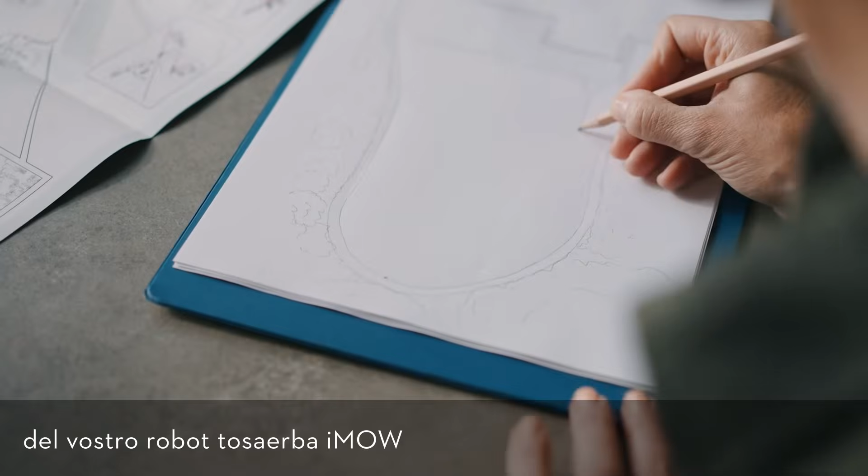We will now show you how to properly prepare the installation of your iMOW robotic mower and things to consider when planning its installation. For a smooth initial operation, first familiarize yourself with the user manual and the quick guide of the robotic mower.

The iMOW robotic mower mows the lawn in random path patterns and recognizes fixed obstacles on the mowing area using ultrasound sensors and a bump sensor. As soon as it detects a fixed obstacle, the device slows down, bumps against the obstacle, and then continues to move in a different direction.

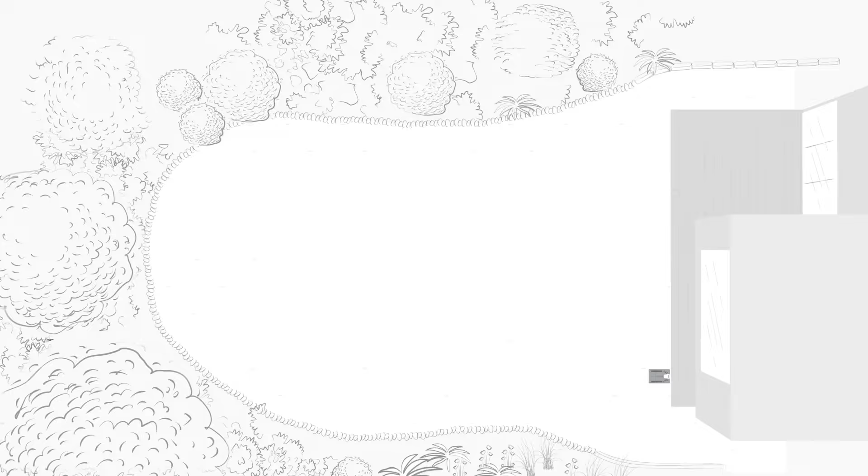To define the borders of the mowing area, you first have to route a perimeter wire around the mowing area. Areas the robot mower must not navigate and obstacles it must not come into contact with can be blocked off from the remaining mowing area with the help of the perimeter wire. If the iMOW identifies or reaches the boundary of the mowing area, it slows down and then continues to move in a different direction.

The robotic mower can be operated and configured at any time with the My iMOW app. You can also use the keys of the control panel. Light strips, a matrix display, and short voice outputs provide information about the current status of the robotic mower.

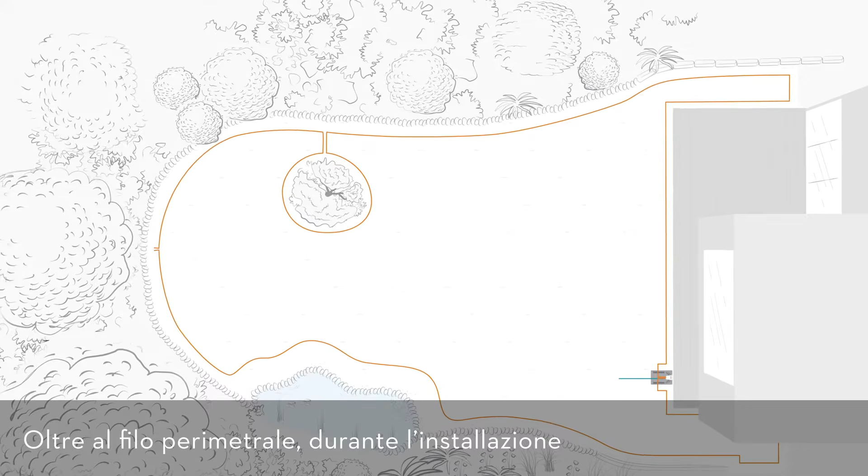In addition to the perimeter wire, a guide wire must also be laid during installation. This helps the robotic mower to find the direct route to the docking station if the mowing operation is canceled or the battery needs to be recharged.

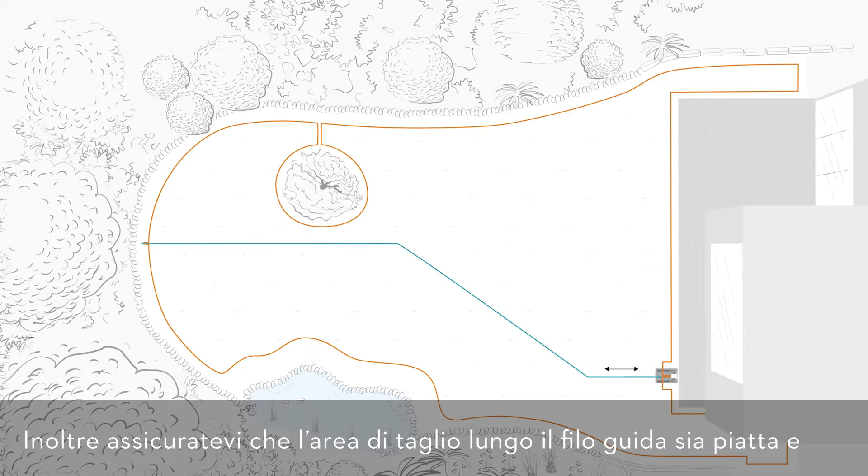The guide wire must be routed from the docking station for 2 meters in a straight line and at a right angle. Also, ensure that the mowing area is level and free from obstacles in the direction of travel towards the docking station along the guide wire: 1.2 meters on the left side and 37 centimeters on the right side.

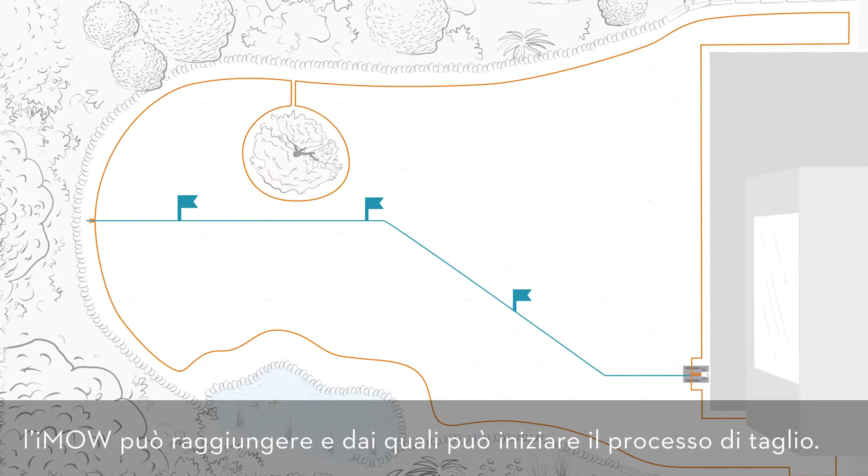You can set up to 3 starting points on a guide wire, which the iMOW can approach directly and start to mow from there. You can also use the guide wire to divide the mowing area into several zones. For example, Zone A and Zone B can be approached separately according to your mowing plan.

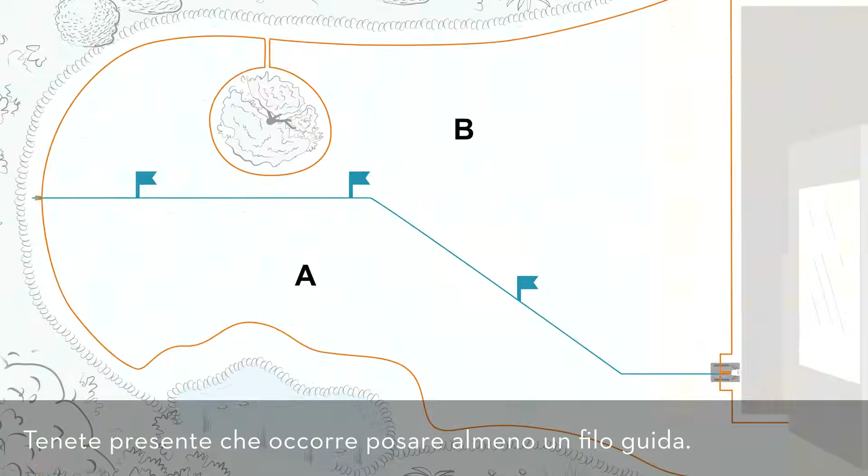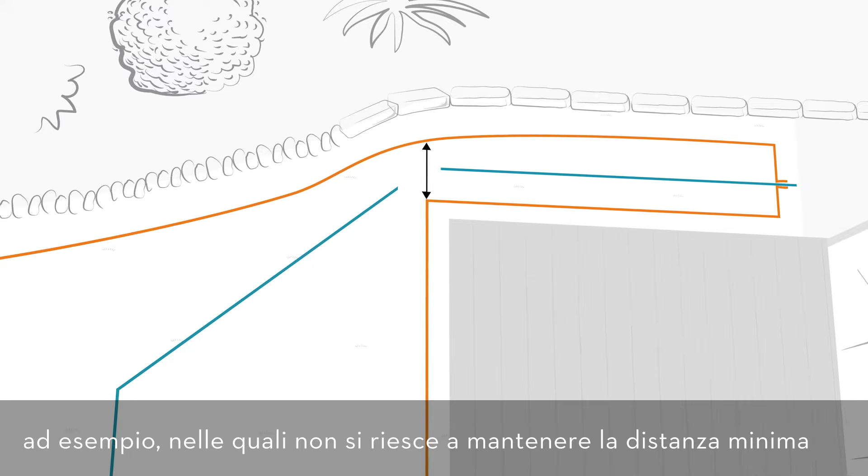Please note that you have to route at least 1 guide wire. By default, you can route 2 guide wires. With the iMOW EVO models, you can even route up to 3 guide wires. This makes it also possible to guide the iMOW through confined areas where the minimum distance between the perimeter wires of 2 meters cannot be achieved.

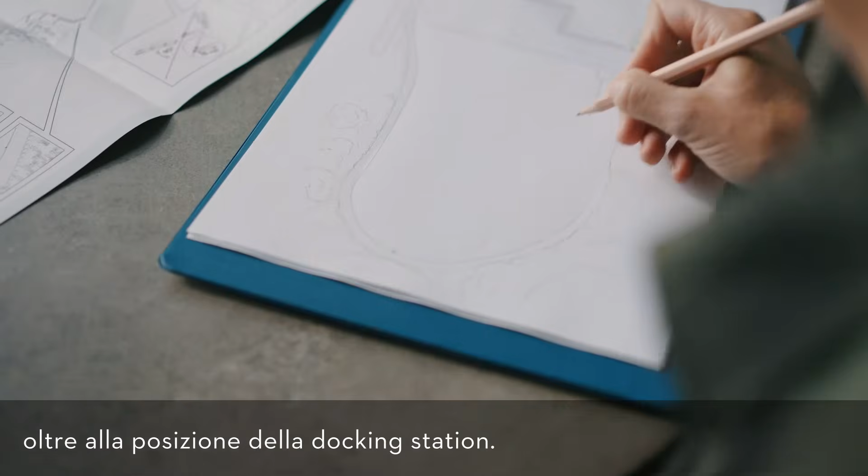Before installing the iMOW, you should draw a sketch of your garden and measure and mark important points to always comply with the required clearances. Also, mark the routing of the perimeter and guide wires, as well as the position of the docking station. There are different options to place the docking station, which you can select individually according to your garden.

The docking station should be placed on a level surface, and its opening should face forward toward the mowing area. It may neither be bent nor may it be inclined forward, to the rear or to the side. The ideal spot is a shady area, protected against the weather, with Wi-Fi reception and close to a wall socket.

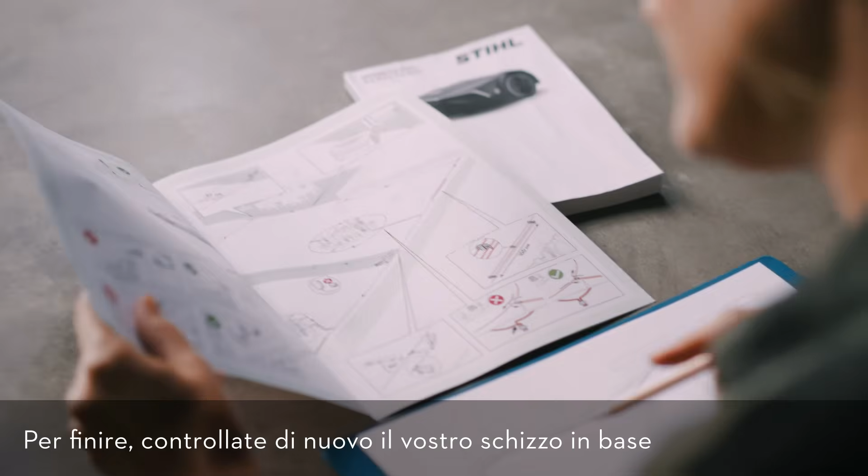As a final step, check your sketch again with regard to the requirements in the quick guide or in the user manual. In your next steps, you can now install your iMOW robotic mower.